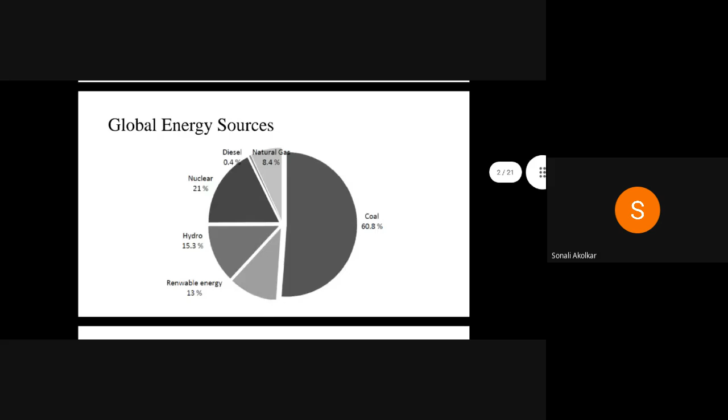May I interrupt for one minute? Please, go ahead. Students, Sanket sir, and all of you - just now our honorable principal sir has joined. He is also always keen to discuss the latest issues in various fields of engineering, so he has joined to encourage students and discuss with all of us. Welcome, sir, to the department for today's expert talk on renewable energy sources. Thank you, ma'am. Sanket sir, please continue. Thank you, yes, yes, yes. Okay, sir.

If we see the global energy sources, what we observe is that the maximum use of energy is from non-renewable sources, and now it's the right time to discuss and study renewable sources. So next we see renewable energy and non-renewable energy - what is meant by renewable energy?

Renewable energy is energy obtained from sources that are essentially inexhaustible, meaning that this source is not going to be exhausted - it is continuously reproducing.

Examples of renewable energy sources include wind power, solar power, geothermal, tidal, and hydroelectric power. The most important feature of renewable energy is that it can be harnessed without the release of harmful pollutants.

What this means is that if we produce energy from renewable sources, there is no harmful pollutant produced from it. Whereas if we produce energy from non-renewable sources, it always comes with some pollutants, such as carbon dioxide, methane, and ethane.

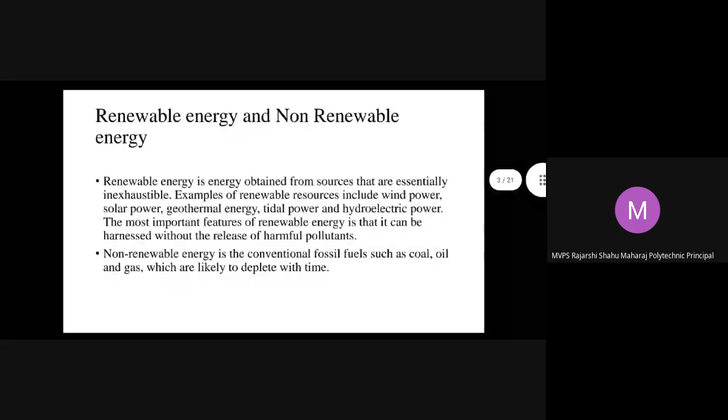But if we produce energy from renewable sources, there are no harmful pollutants produced. Non-renewable energy comes from conventional fossil fuels such as coal, oil, and gas, which are likely to deplete with time - we all know that these non-renewable sources are going to deplete over time.

If we consider the 1920s, we had lots of diesel, coal, petrol, and crude oil available. Currently, we are left with only 5 to 6% of it, and many are researching for more, but it is very difficult to find additional reserves.

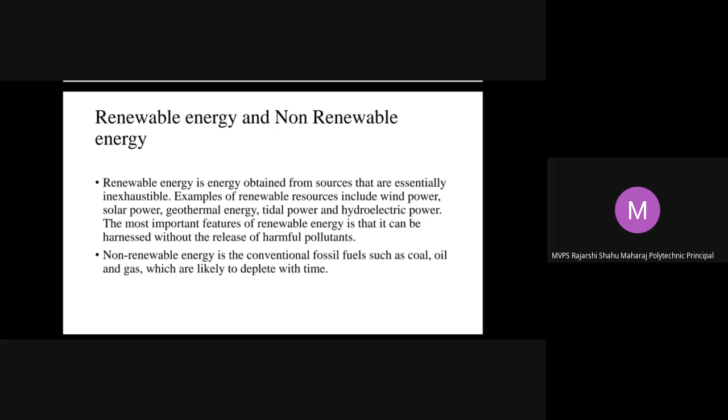Now we consider the first renewable energy source which is used: wind energy source. Wind energy is a free renewable resource, so no matter how much is used today, there will still be the same supply in the future.

Wind energy is also a source of clean, non-polluting electricity unlike conventional power plants. Wind plants emit no air pollutants or greenhouse gases. There is no restriction for wind. It is present for a long time and it is completely inexhaustible, so wind energy is completely free. We can easily get it anywhere.

You all know that the blade is something used to give rotation to the turbine, by which we get the energy. The rotor is used for rotating the blades. Pitch is something which gives you the circular dimension by which the blades are rotating. After that, brakes — sometimes the wind pressure is very high and we need to use brakes to limit that speed.

Next one is a low speed shaft. If the wind speed is very low and we require to generate more amount of energy, then this low speed shaft is used. By using this shaft, we can set the turbine for low speed, by which we get the same amount of energy. After that, there is a gearbox.

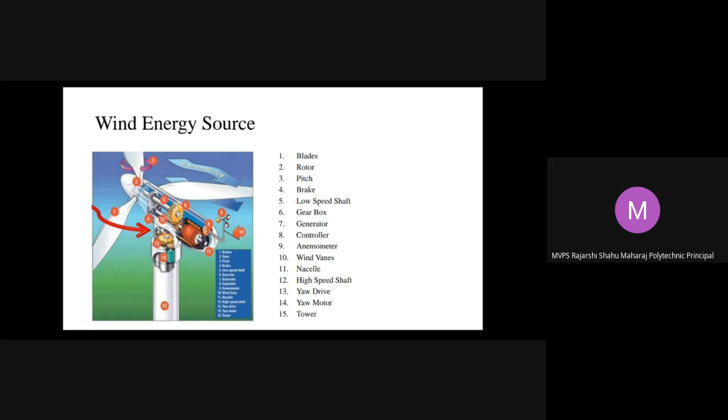The anemometer is something used to give the direction to the wind turbine. After that, there are wind vanes. If we consider it horizontally, the air should pass from the blades to the backside of the turbine, and for this we require wind vanes to reduce the overall air drag. After that, there is the nacelle.

The nacelle is something directly connected with the wind vanes, and it gives direction to the winds. After that, there is a high speed shaft, used when the speed of the wind is very high. The high speed shaft is nothing but a gear combination by which we can reduce the rotation of the blade.

After that, there is a yaw drive and yaw motor. Yaw means directional — we have to direct the blades, and for that we require the yaw drive and the yaw motor. And the last one is the tower, on which this whole assembly is going to be installed.

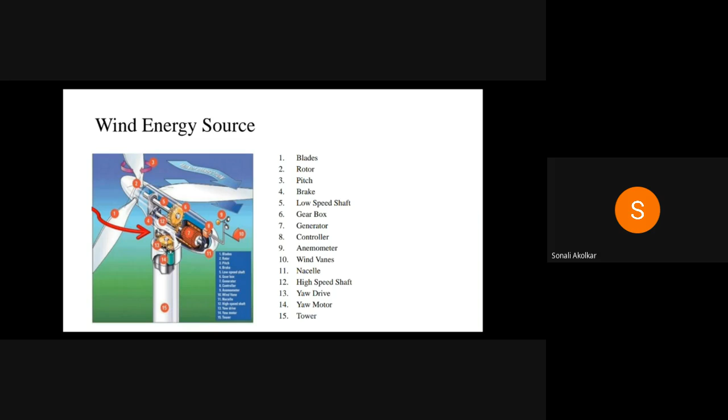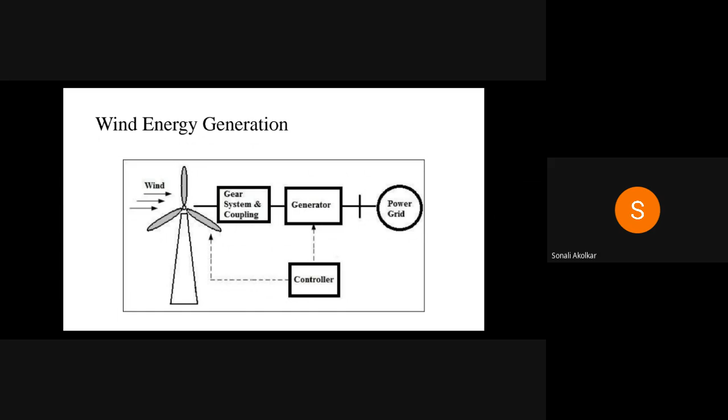Next main point: tidal energy source. Tidal power or tidal energy is a form of hydropower that converts the energy obtained from tides into a useful form of power, mainly electricity. What this means is that tidal is nothing but wave energy — we are going to generate electricity by using waves.

Tides are more predictable than wind and sun, because we all know there is high tide and low tide which is continuously running. Among sources of renewable energy, tidal energy has traditionally suffered from relatively high cost and limited availability of sites with sufficient high tidal range or flow velocity, thus constricting its total availability.

What this means is that for installing this tidal energy generation, we need a firm beach — we cannot install it in a ductile beach or ductile location. We need a fixed beach and proper construction is required, and that's why it costs very high.

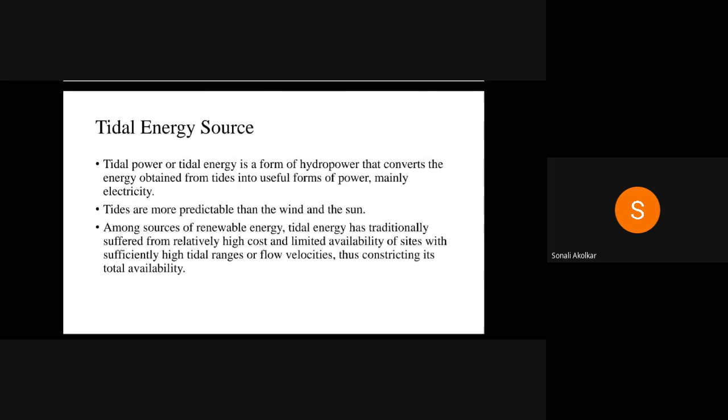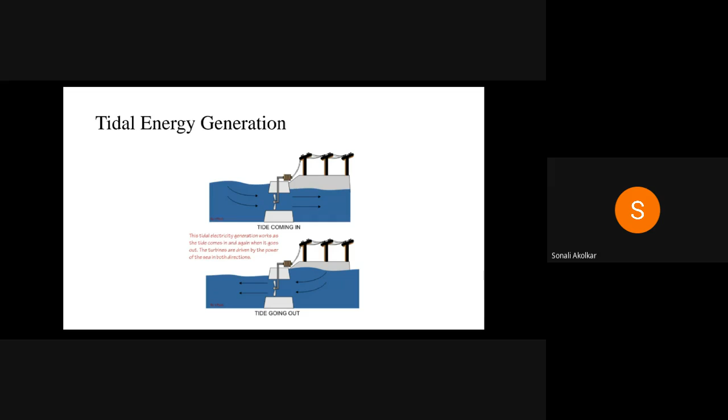You can see there are power lines and a turbine. When the tide comes in, the generator rotates and we get electricity. When the water reaches its high point, and then decreases, we get the tide going out, and by that we also get electricity.

This is the proper construction of tidal energy generation. You can see there is an ocean, head height, tidal barrage, road, sluice gates, high water level, and tidal basin.

For installing this kind of energy generation, we first construct the tidal basin. The tidal basin is a high water level point where we can store or collect tides up to a certain level, and after that we close the sluice gates so we can store that water for some time.

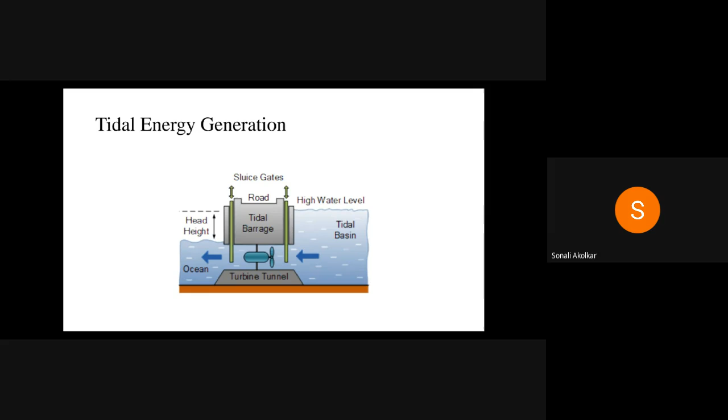When the ocean water goes inside the tidal basin, the turbine rotates and we get energy. After it reaches the high water level point, the tidal basin gets discharged, and from that we also get electricity. Next point is biomass or biogas energy source.

Biomass is an organic material that comes from plants and animals, and it is a renewable source of energy, because we all know there is waste everywhere, and every waste contains solar power in it, so we get biomass from it.

Biomass contains stored energy from the sun. Plants absorb the sun's energy in a process called photosynthesis. When biomass is burned, the chemical energy in biomass is released as heat. As I told you, every waste contains some amount of solar energy by which we can get energy.

This energy can take any form, such as heat or electricity. If we use it as LPG or CNG, we can use it directly, burn it, and get heat from it. This kind of energy is used in many applications.

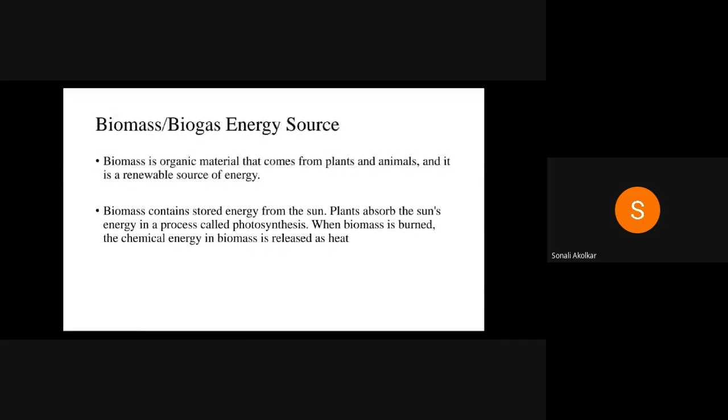Let's see the sources of biomass: municipal solid waste, industrial residues, animal residues, agriculture crops and residues, sewage, and forestry crops. There are a lot of sources of biomass.

Biomass is very important, because if we collect all kinds of biomass, we can generate a huge amount of electricity as well as a huge amount of energy.

In residential applications, biomass can be used for space heating or cooking. Industry and businesses use biomass for several purposes, including space heating, hot water heating, and electricity generation. Many industrial facilities, such as lumber mills, naturally produce organic waste.

For generating electricity, the producer gas from the biomass gasifier is first cleaned and cooled, then used as fuel in IC engines. This means we can use this biomass energy, cool it down to convert it into liquid form, and use that again in an IC engine to get energy.

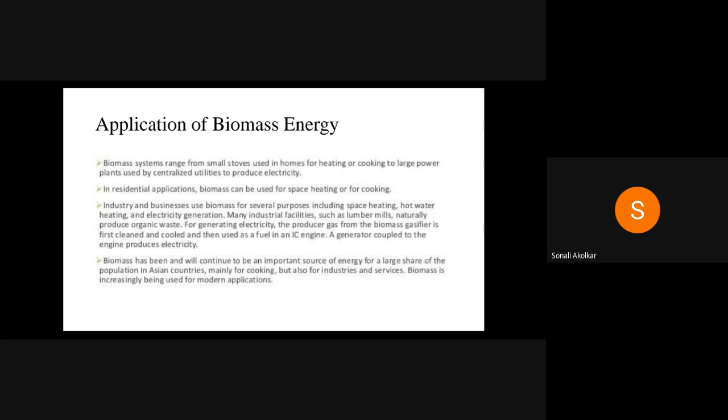Now this is the main point of today's seminar, which is solar energy, something I am good at. Let's see what exactly solar energy is. Solar power is harnessed using solar photovoltaic technology that converts sunlight into electricity using semiconductors.

We all can see solar energy, so how are we going to harness or harvest that energy - that's the main point. What we use for capturing this energy is solar photovoltaic cells, which convert sunlight into electricity using semiconductors.

When sun hits the semiconductor within a PV cell, electrons are freed and the busbar collects the running electrons, which results in electric current. We all know about potential difference - the definition of voltage flow is that when there is a potential difference, voltage flows.

This is the same thing. When the sun falls on the solar panel, the potential in the photovoltaic cells tries to go out or run, and whatever runs between the cells is nothing but electrons, and electrons are nothing but current.

Next, commercial residential PV modules range in power output from 10 watts to 300 watts. I have installed many solar projects where we used around 300, 320 watts. Now panels of around 320 to 350 watts are also available.

Next one is a solar off-grid system. If we compare this above system with the off-grid system, you can see there is a controller and batteries, which are important. This one is connected with the grid, this one is not connected with the grid. The working is similar to other solar energy devices - we get the solar output and give it to the controller, which gives the proper charging current to the battery, which is connected to the inverter, and the inverter gives power to the household application.

Now here we require maintenance for the batteries, whereas in the on-grid system we don't require any kind of basic maintenance. But if we compare the advantages and disadvantages of both systems, the main advantage is that the solar off-grid system can be used when there is no electricity. So this system is also called a standalone system, but it continuously requires solar for running its applications. If there is no solar and no grid, not a single device is going to run. Whereas in the on-grid system, even if the grid is not there, you can run those systems as long as solar is available.

Now let's see what are the solar energy applications. First is heating and cooling of residential buildings.

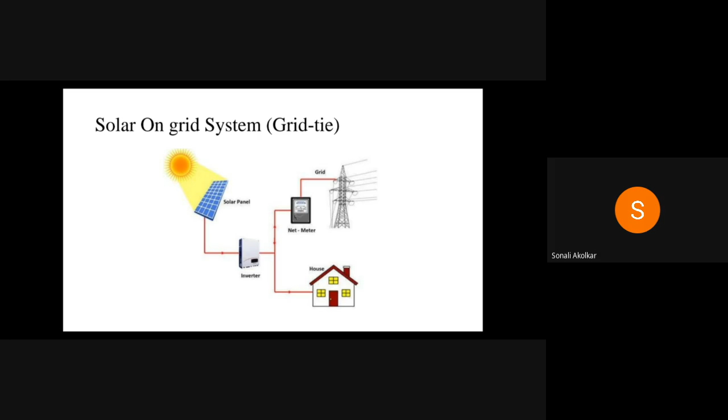One of my projects installed at the Satana branch, Kilbil International School, has already sent me their light bills. First, they were getting a bill of around 1.5 lakhs, and now they are getting only 30,000. So this is the benefit of a solar on-grid system.

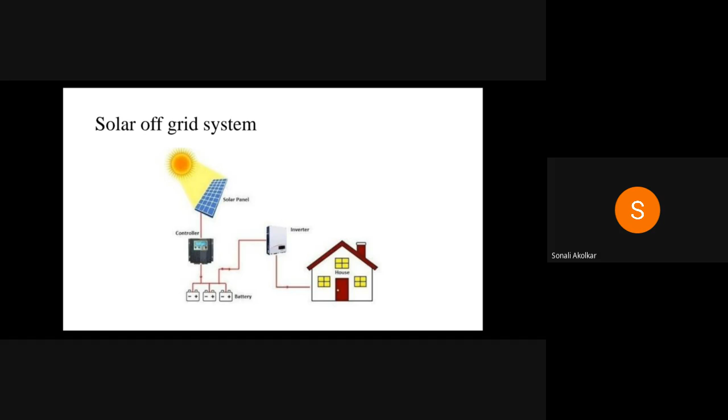Off grid is also very efficient because it is a completely standalone system. Even if you can't take MSEB, your system keeps running continuously. The main requirement is that you only require solar energy. We require grid electricity during some foggy or rainy days, but other than that, this is a completely standalone system.

Now, what is the business opportunity you get in solar? Everyone is developing, and in diploma you also have to do projects. So what you can do, or the business opportunity in solar, is that you can manufacture solar machines, meaning off-grid and on-grid systems.

After that, solar AMC means what? Solar annual maintenance contract. In this, you are going to continuously do technical analysis of the machine, panel analysis, power quality analyzing, and power monitoring. So this comes under solar AMC.

After that, solar on grid as well as off grid sites - you can collect tenders from the government to do these kinds of things. After that, there is solar installation for industry and commercial complexes, meaning you can install solar for common lighting.

We must make people aware to use solar, because solar is free right now. We just require some initial cost, by which we get free electricity. And after that is solar energy consulting - through this you can make people aware about solar energy and encourage them to use it.